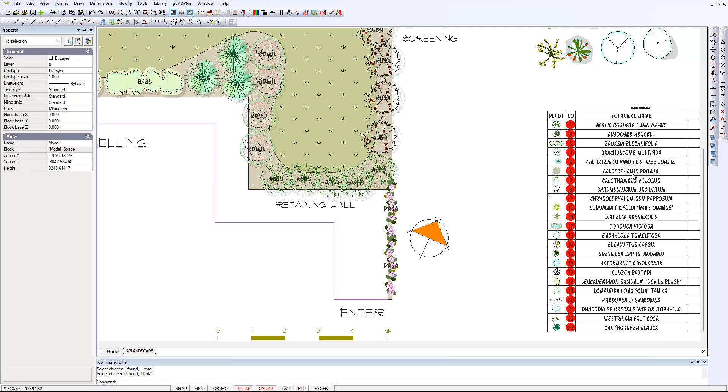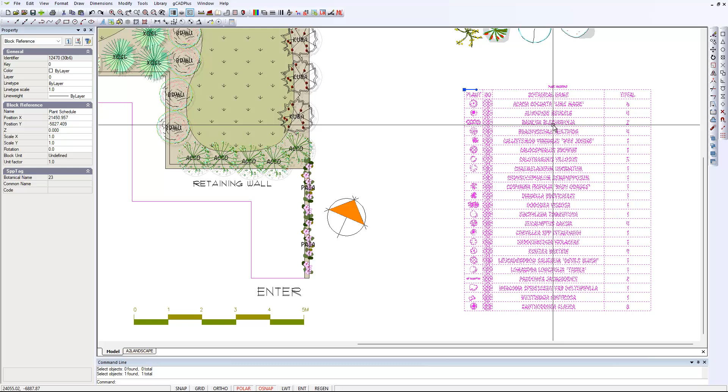Landscape designers always need a plant schedule to attach to their design. Here's an example: botanical name, plant, a number, a little tag, and then total. So if I add extra symbols and update, then that number will increment. We have lots of movies on our YouTube channel demonstrating how to handle a plant schedule in this way. It generates a block, and we can get into that block and edit it, in this case make the heading taller and so on.

But there's an alternative way. If we come to gCADPlus, that first schedule in this drawing is handled by tools here. But if we come down to broad scale planting, we can have another set of tools. I'm going to swing to another one.

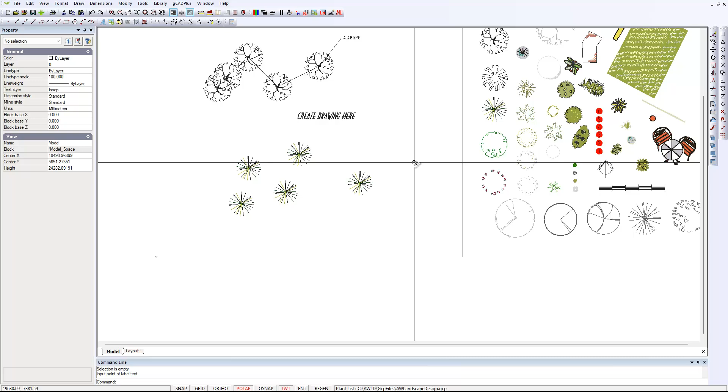I just run another one of the templates in gCADPlus. What this next tool can do is just put a line between numbers of similar species and then tag them in that way. Let's demonstrate.

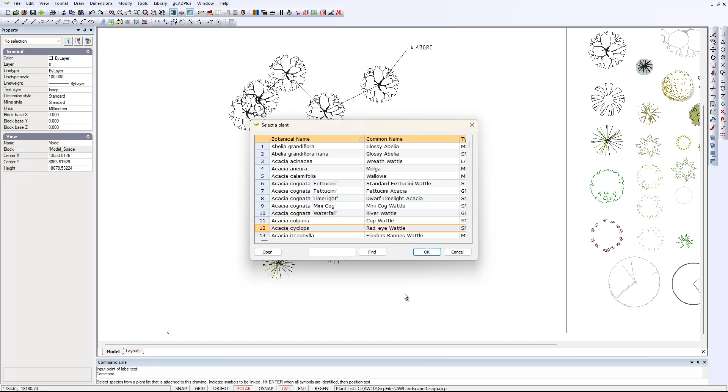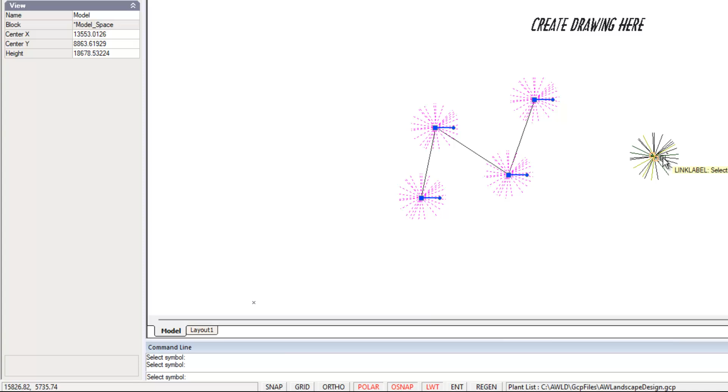So we go to gCADPlus, broad scale planting. We say I'm going to label a group of species, and I'll say Acacia cyclops is this new one. We're asked the question, single line or multiple lines, multi-tagging. Select the symbol and the next symbol. Notice that a line joins them automatically, another one and another one. Now we want to finish, and for that hit the enter key and input the label. We want this label to be around here. The height probably needs to be closer to 300, and enter, and in it goes.

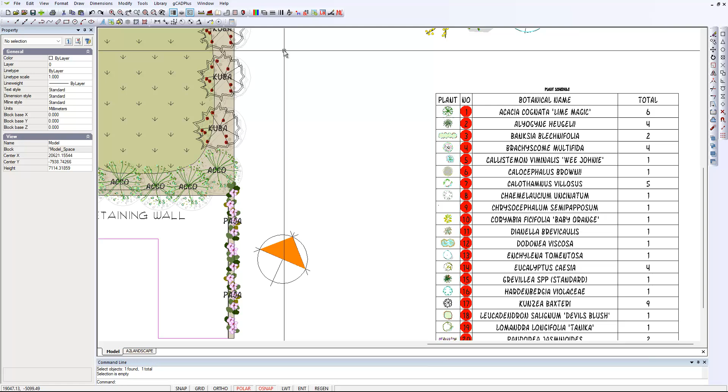So there, those symbols are tagged. But if we go back to the other one, which was worked in a different way, and we pick this symbol here, it's tagged - we see it in the properties box. Let's come back to this new way of working, or different way of working, and we click the symbol. It is not tagged in the same sense.

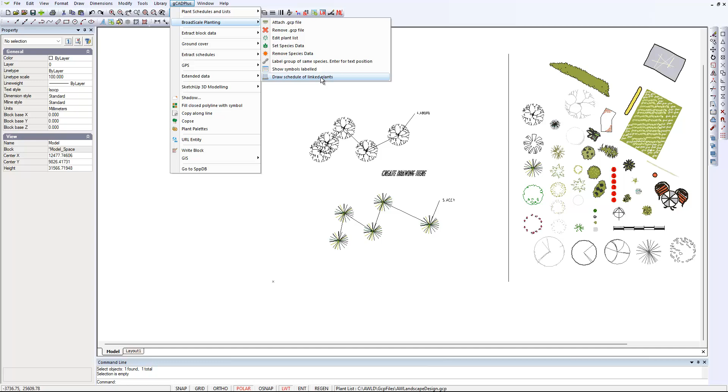We can still draw a plant schedule. gCADPlus, so all the tools you need here are down here. So we can say draw the schedule of linked plants. First point here, second point there. Actually, there's only going to be 2 entries in there. And there we are: code, botanical name, common name, and number. And there they are - a different format, a different way of working, but just as effective and very, very quick.

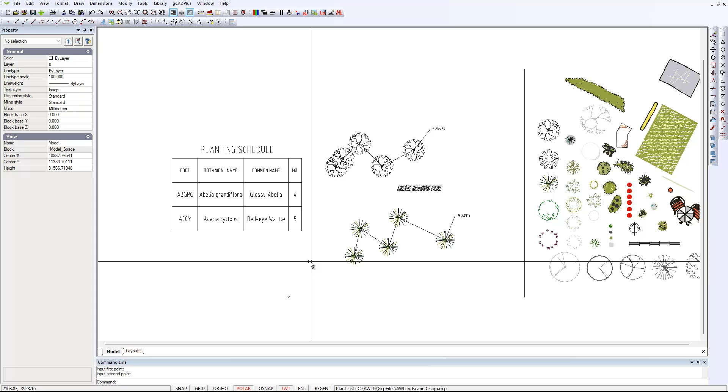Well, this system of working does have one advantage. I can use the same symbol and have a different tag to it.

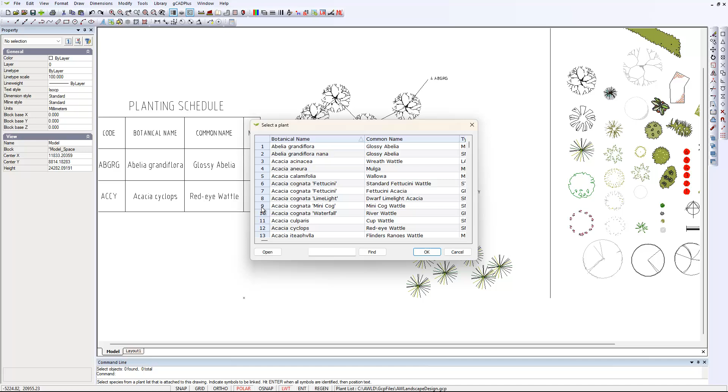So let's illustrate. We'll go gCADPlus, label a group. Let's imagine that it's another, that we use Acacia cyclops. Let's pick Acacia cognata Mini Cog, and we'll say OK. We're going to go multi, and we'll follow the same rules. Click, click, click, click, click, and enter.

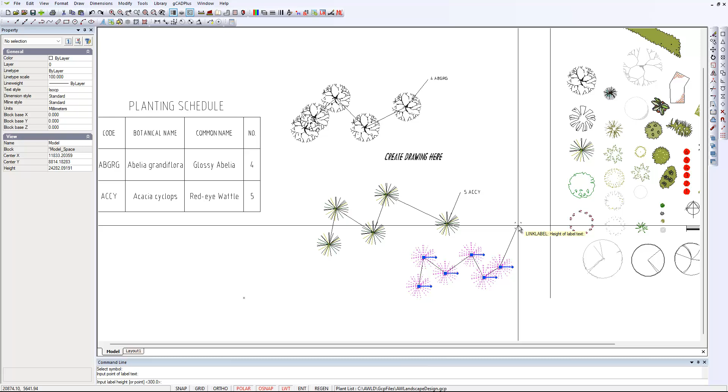So gCADPlus has done its job using this broad scale system, so you can produce landscape plans with the same symbol being used over and over again, but attached to different species, and that's quite different to the earlier system that we discussed. Just different, but for some applications, especially large revegetation programs, this, I think, works much better.

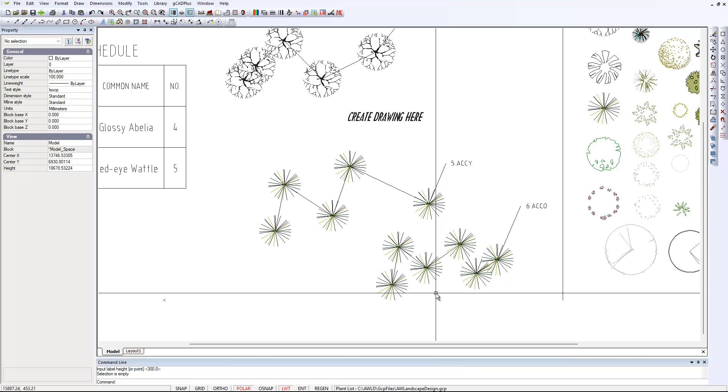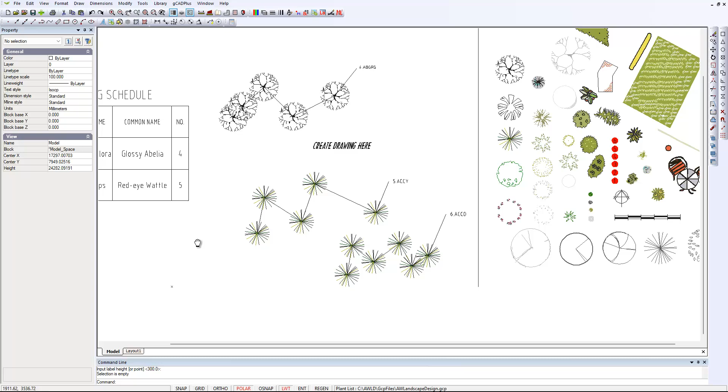You might just be using this as a symbol for quite small, tufty plants, and you might have quite a range of them at your disposal, and you want to label them in this way. And again, we could do the plant schedule and update it, and the numbers would increase. So we now have 3 species in our little planting schedule.